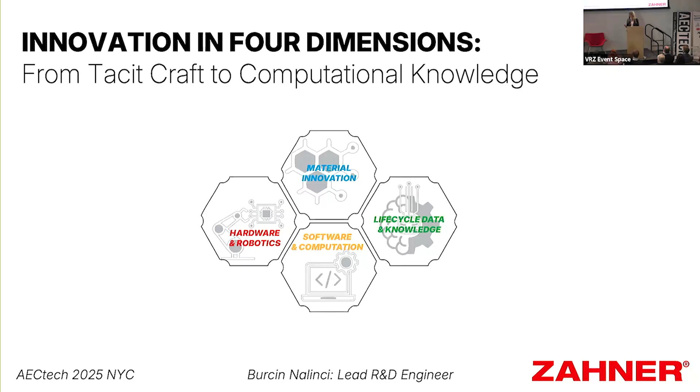If you're not familiar with Zahner, we're a 125-year-old company, so that's 1897, located in Kansas City, Missouri. We specialize in architectural sheet metal fabrication and installation at many scales. Over the decades, we've been part of many iconic and often uniquely challenging projects. So I'm going to scroll through some of those examples and talk a little bit more about our story.

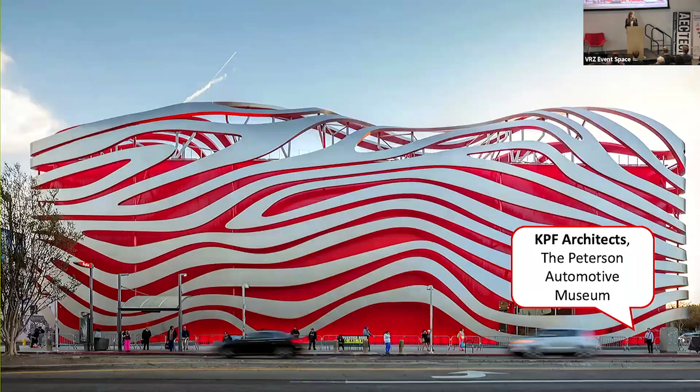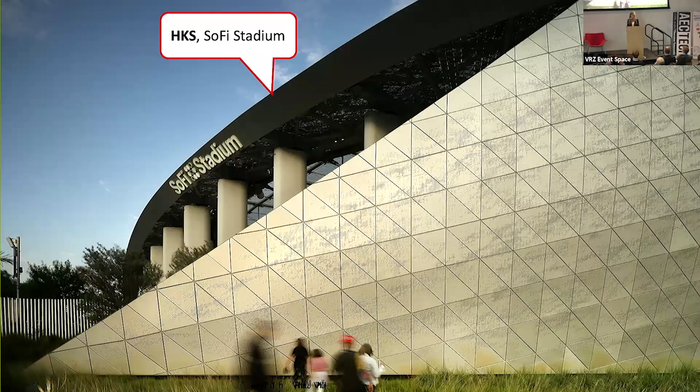Our legacy is built on a culture of innovation, developing new technologies, passing down the generational knowledge of craft, and a desire to explore the unknown, often in collaboration with architects and partners that want to push the boundaries. When the right tools didn't exist, we built them, and we applied them in ways that reshaped architecture, turning sheet metal into complex geometry, pioneering new methods, and scaling custom finishes.

By the 1990s, Zahner was among the first to link CNC machines to architectural models, most famously with Experience Music Project, and that was a turning point. Digital fabrication and computation merged, complex geometry became real in metal.

This is our lineage. From union craft to new technologies, a culture built to innovate. And at the heart of it is something harder to define, but impossible to miss: the tacit craft carried in the hands of our people.

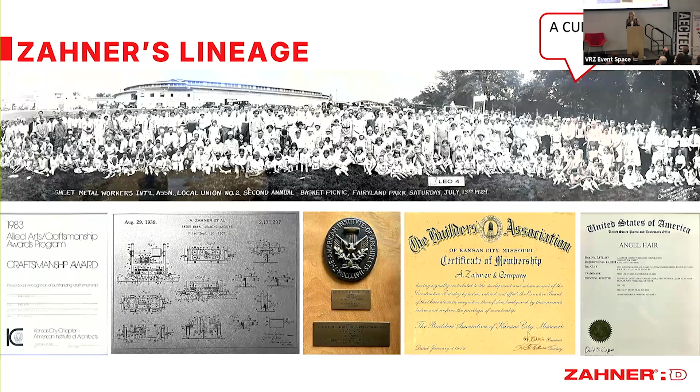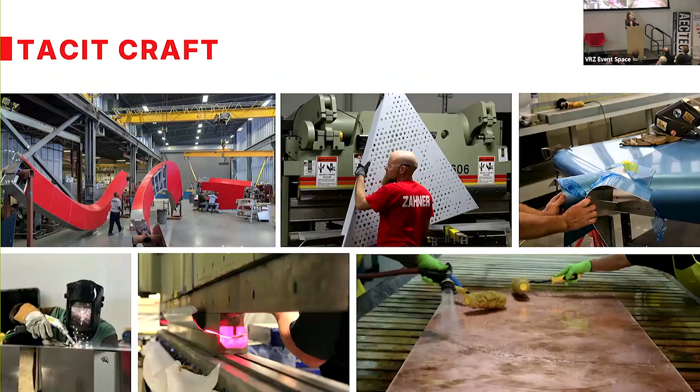Tacit craft is the unspoken, experience-based know-how, the kind that we cannot capture in data or manuals alone. An example of that is a welder knowing by feel when a seam gets too hot and adjusting speed or angle to mitigate that. Or an installer adjusting panels on site, knowing when to nudge, flex, or ease a piece into place without damaging the surface.

So this knowledge carried in the hands of our people defines who we are. It reminds us that the finishing touches belong to craftspeople, the difference between generational buildings and temporary ones.

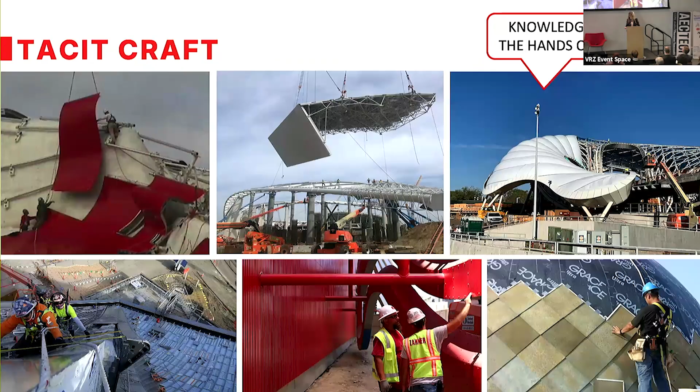Our patented sheet metal seaming machine in the 1930s symbolized necessity driving innovation, but it was never about the tools alone. It was about how we applied them. That kind of mindset has set decades of innovation in geometry, process, software, and machines. And it continues in R&D today.

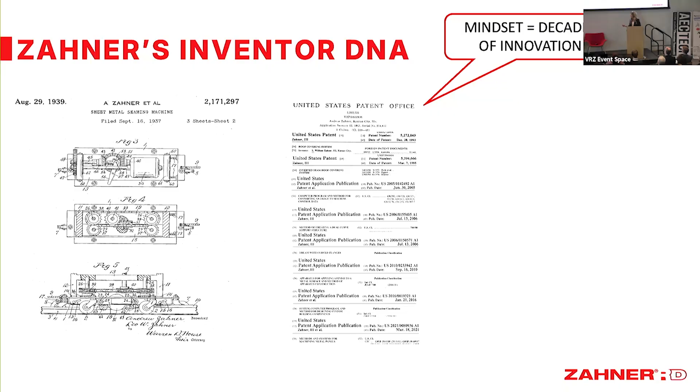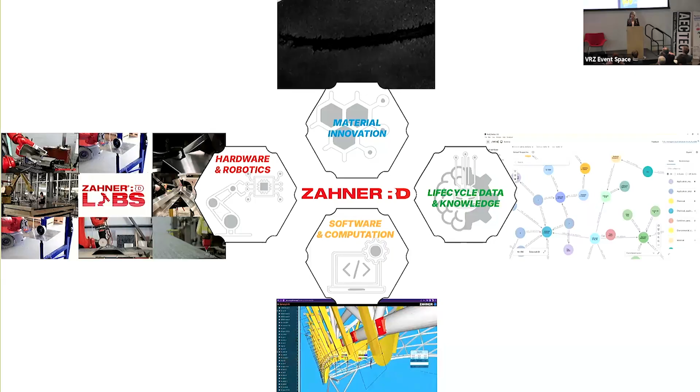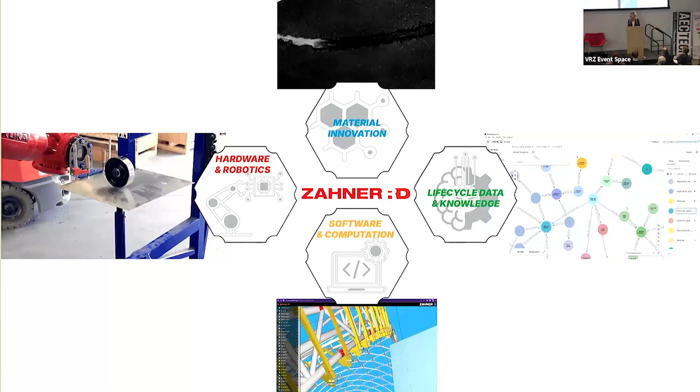Our work is based on four dimensions, as the title suggests: hardware and robotics, software and computation, material innovation, and life cycle knowledge. These are not silos. Instead, they form systems: machines that extend the hand, software that connects people in place, material that evolves, and knowledge that grows with every project we work on.

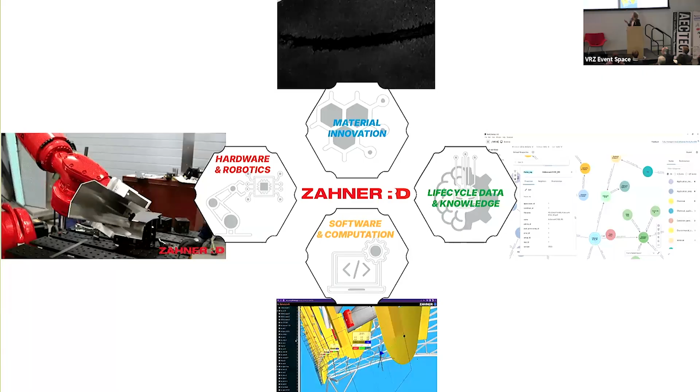So I'm going to scroll through some of the R&D examples here. We'll start in the shop with a project where union craft meets automation with robot-assisted welding.

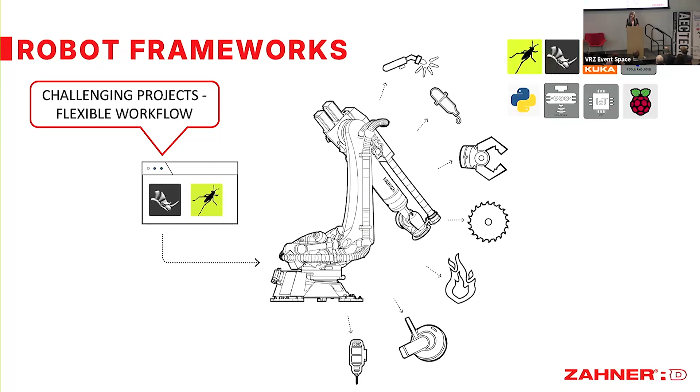With every challenging project we get, robots give us that flexibility. So we love robots. And given our history in union craft, we've been developing robot-assisted workflows to combine the precision and repeatability of the robot with the intuition of the craftspeople. This is all towards empowering the craftsmen.

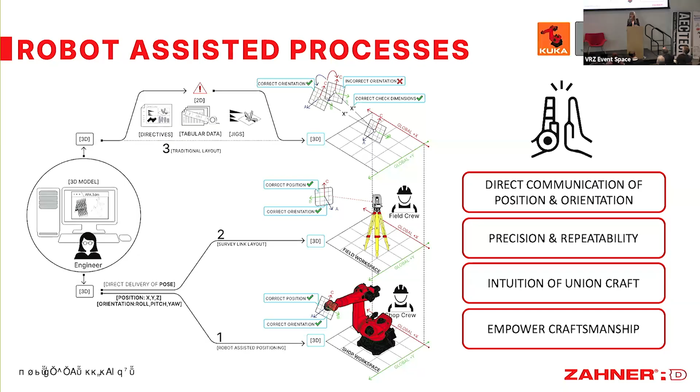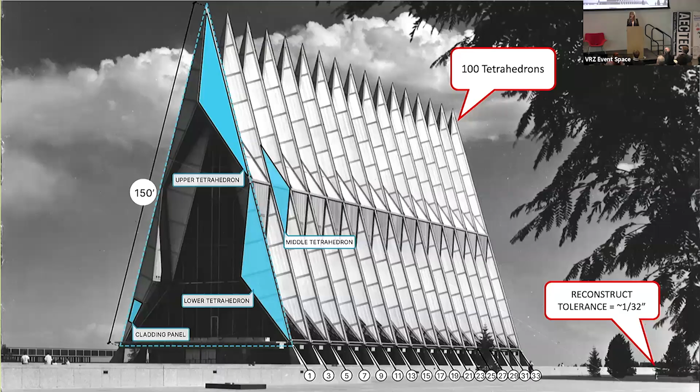Where this process had great impact was the Air Force Academy Cadet Chapel in Colorado Springs. We were commissioned to rebuild the envelope to a watertight condition with 1/32 inch tolerance. Conceptually, the original building was a brilliant piece of combinatorics, repeating parts forming a greater whole. But when we started working on it, every instance was unique due to field conditions and change over time.

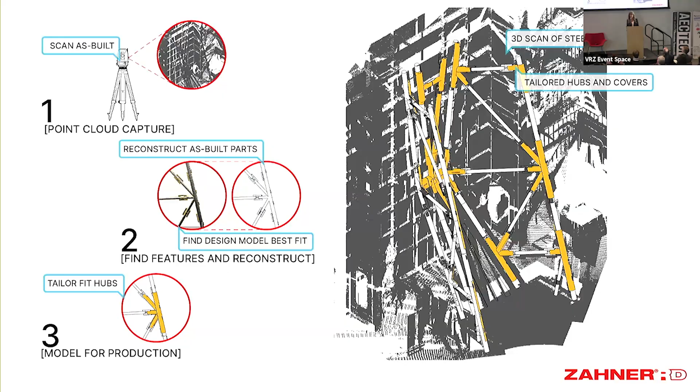So our strategy was simple. We started with 3D scanning the existing structural steel, modeled tailor-fit parts in CATIA, and then generated cut files and robotic workflows using Grasshopper and Rhino. To manage that complexity, we embedded metadata all the way from CATIA and communicated that throughout the process to the robot, including embedded directives in the robot controller, removing the paper directive there a little bit. This way, we were able to index the parts to the robot and back to the digital model.

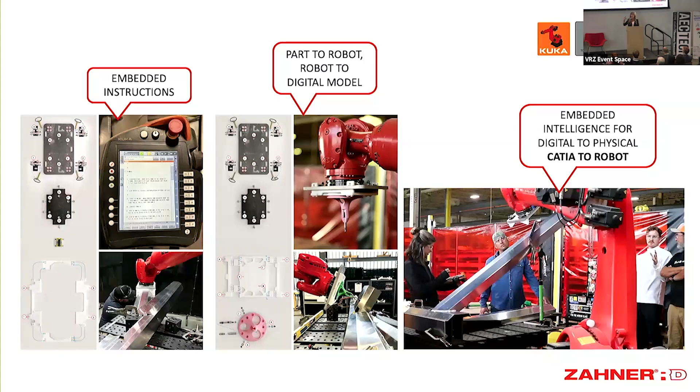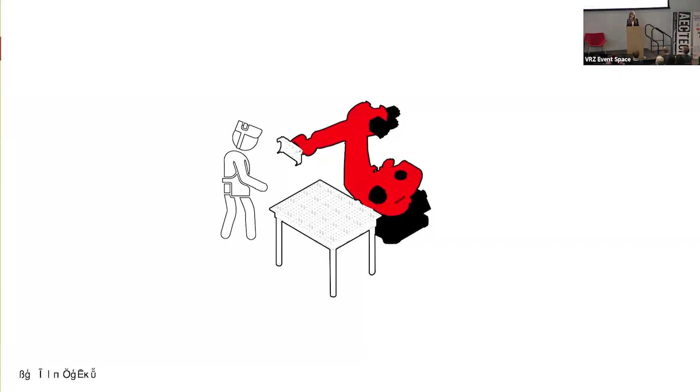The key is we didn't try to automate everything. Welding is full of tacit knowledge, the pace of the bead, the instinct to adjust. Instead of trying to automate everything, we focused on where automation made sense: positioning and orientation. That gave our union welders a precise starting point so they could do what they do best.

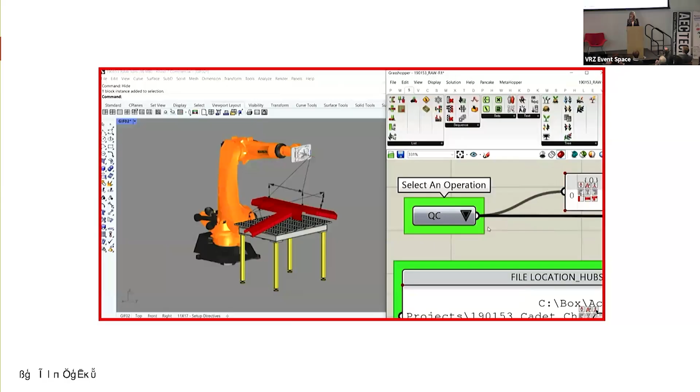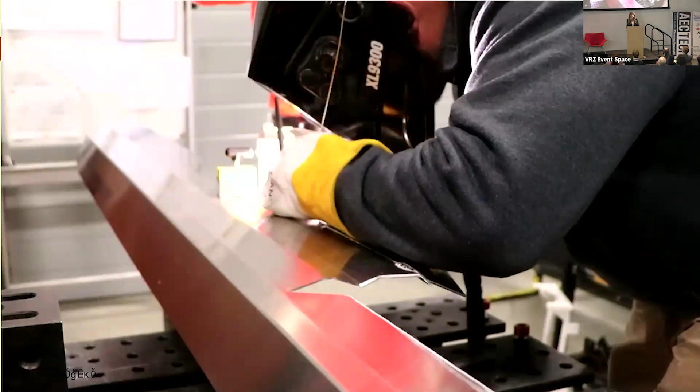In that way, we worked throughout this process side by side with them. I think some of the earlier sessions touch on that, like tool building for people, the users, so getting feedback from the users, in this case the union welders, to make the best process. In the end, the future isn't about replacing craft, it's about making it enduring, turning their expertise and experience into knowledge that we can build on.

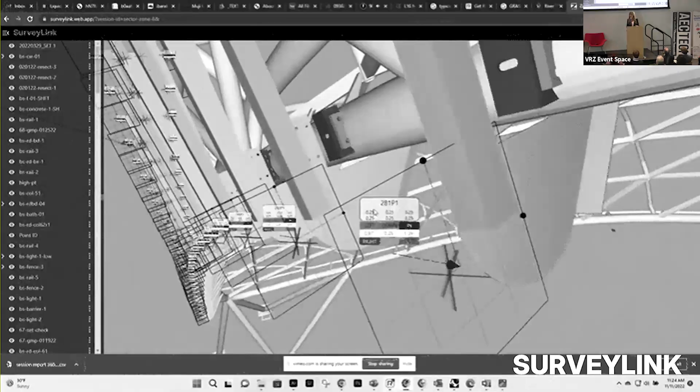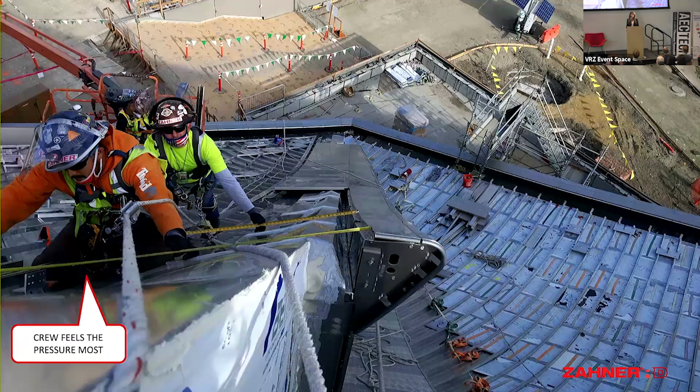So next up is the field, with a project where union craft and automation come together. In this case, every scope converges with SurveyLink. This is the riskiest phase of a project, not just because of tough working conditions, but because even the smallest error can cascade into costly rebuilds or schedule delays.

The install crew feels that pressure the most, juggling fast-moving parts, often relying on 2D directives, dimension tables, or checking manually. So our question was simple: how do we extend computation to the field? The answer was SurveyLink, not to replace the craft, but to remove the guesswork so crews can spend more time building and less time checking.

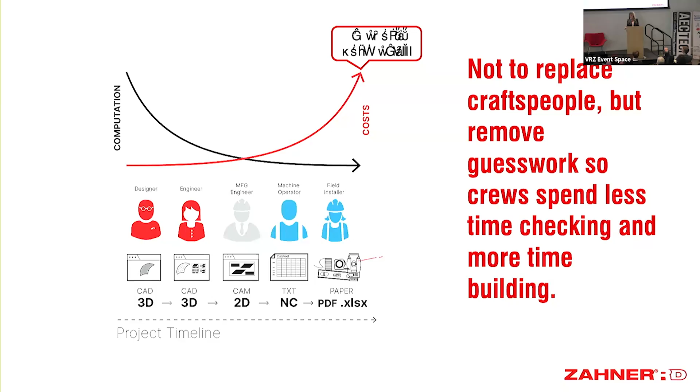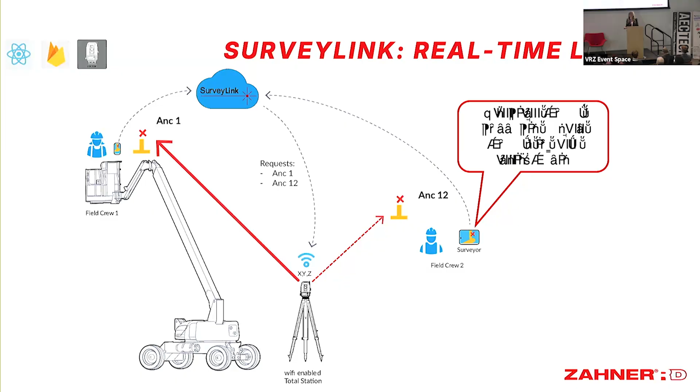SurveyLink is Zahner's proprietary in-house developed platform that connects the design model to field instruments, giving precise position and orientation information to any stakeholder. That means robotic total stations, 3D printed jigs for reflector prisms, and a cloud platform built in JavaScript to queue and track positions.

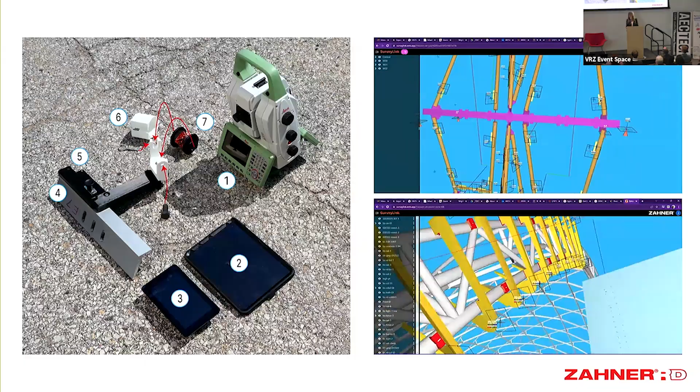So we scan the field condition, we get a point cloud, and then reconcile that with the design model, creating a directing model that feeds our web platform and the cloud calculators.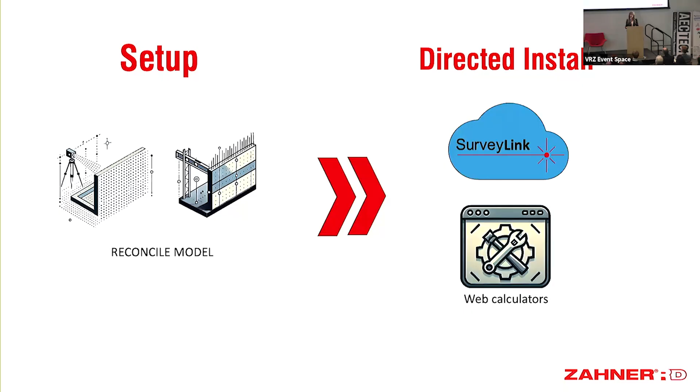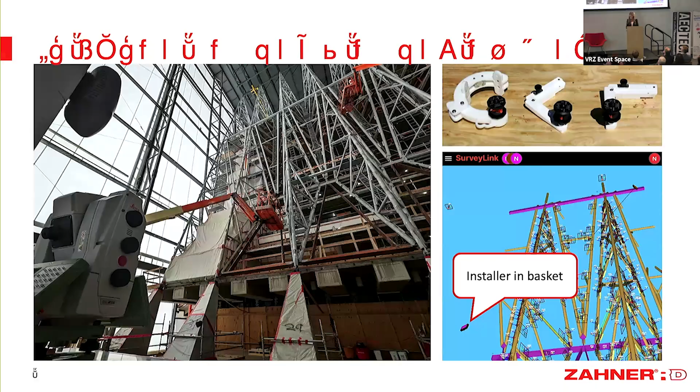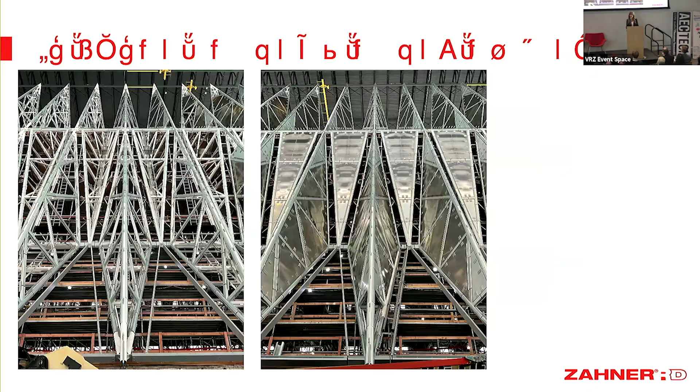SurveyLink has already been deployed on many projects. Air Force Academy Cadet Chapel is one of them. At the chapel, we drew roughly 6,000 anchors into place, which means the rest of the scope just flies in. Currently, the crew is installing the very last bits of the hubs we looked at with a robot-assisted welding process.

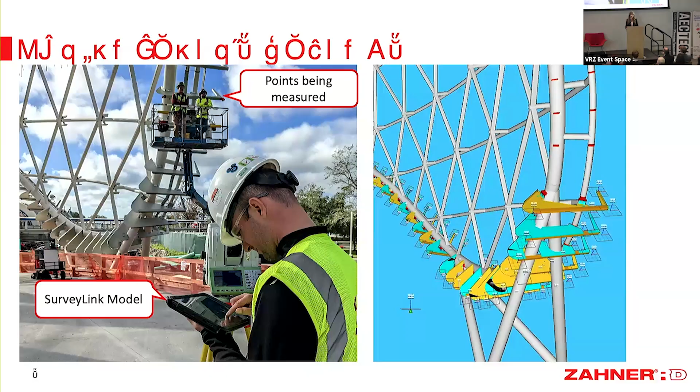Here's another project, same kit of parts, very different geometries. With this project, there were 1,600 unique dual curved surfaces, or very complex curvatures, forming a continuous curved finished building. Here's the space shuttle Endeavour, being housed in the California Science Center.

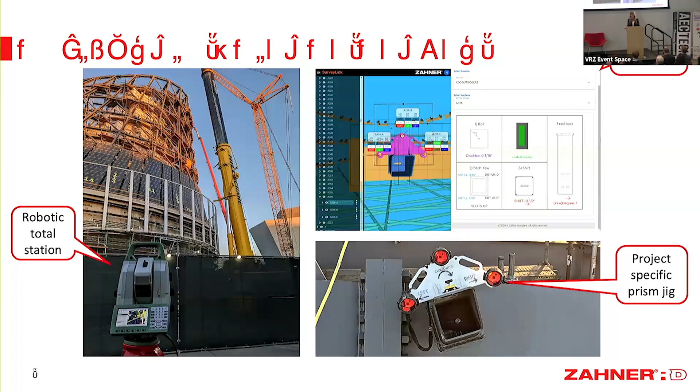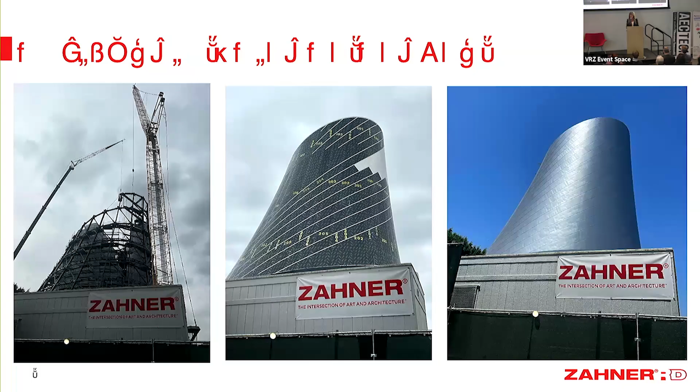Exactly the same process, same kit of parts, again different geometries. With this one, we drew roughly 350 outriggers into place, resulting in ZEPs and skins flying into place without any issues.

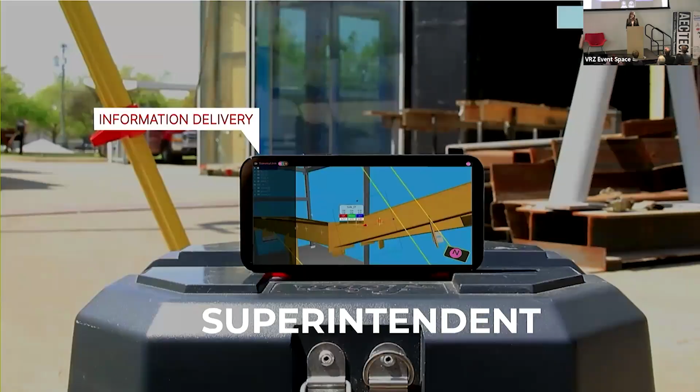SurveyLink is a project-agnostic tool that helps our field crew navigate complex layout processes. It turns feedback loops from days into minutes, with data accessible to everyone - installers in a basket, managers in the office, or even stakeholders checking in remotely. With every deployment, it leaves a digital trace, so we can start collecting that data, analyzing it, and identifying pressure points earlier on, making better judgment calls earlier, both in the shop, field, and design.

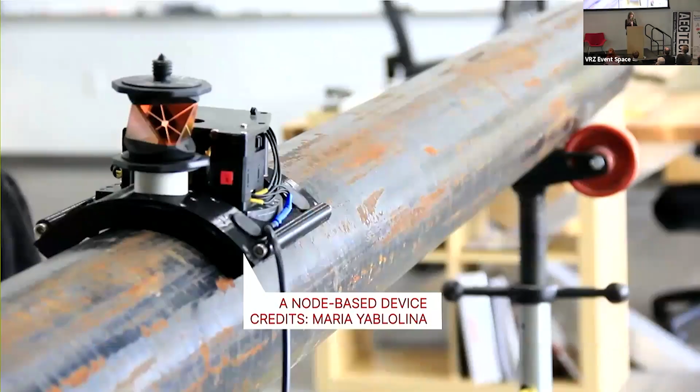And because it's a node-based platform, we can connect other communication devices into the system, like the crawling robot we did with Maria Yablonina to access hard-to-reach places. But again, with this one, I think the future points us towards not automating robots, but connecting the knowledge back into the life cycle itself.

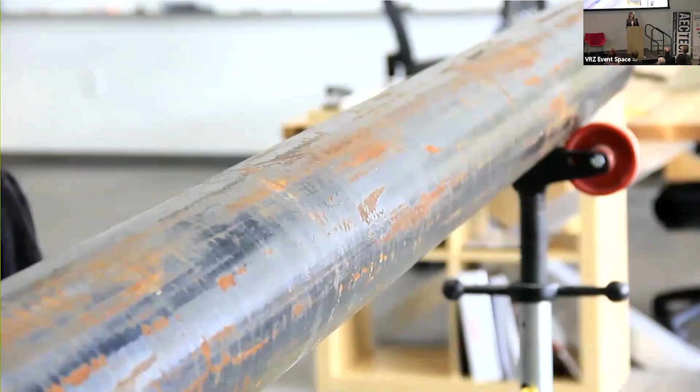So far we looked at how robots, craftspeople, and computation form, shape, and position geometry in shop and field. But some of these principles extend to the very surfaces of the metal itself. So we'll take a look at patinas.

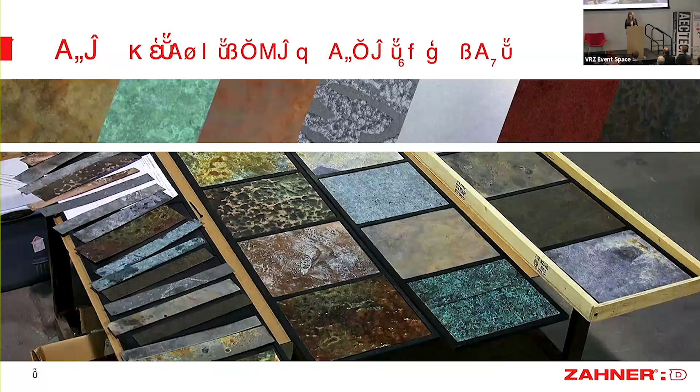Patinas are living minerals that form on metal surfaces. They are both aesthetic and performative. They change with environmental stimuli, like salinity, pollution, time, just to name a few. In nature, this is a very slow forming process. It's also a very unpredictable process, but beautifully complex.

At Zahner, we learned to guide that process. For decades, we've been working with pre-weathered patinas, experimental, hand-applied, eventually deployed on major projects. But much of this work has been developed under the leadership of Bill Zahner. He often reminded the team that patinas need controlled variation - too much control, and it's just like paint.

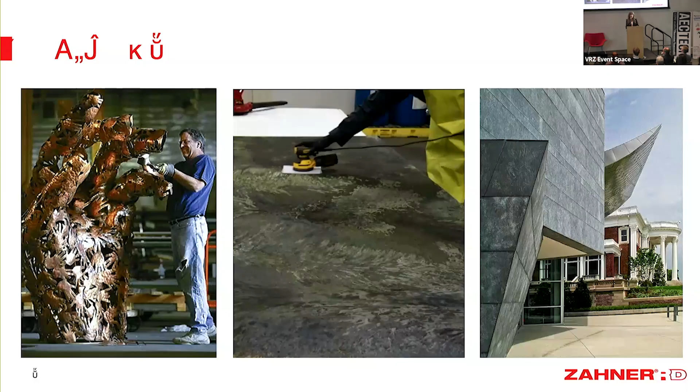So our patent-pending process, selective patina, builds directly on this legacy of control and variation that Bill described.

With selective patina, our designer tools extend into a new space where we can convert design intent into machine instructions. With selective patina - and my titles are funky, I just noticed that - designer tools become chemicals that accelerate or resist oxide growth.

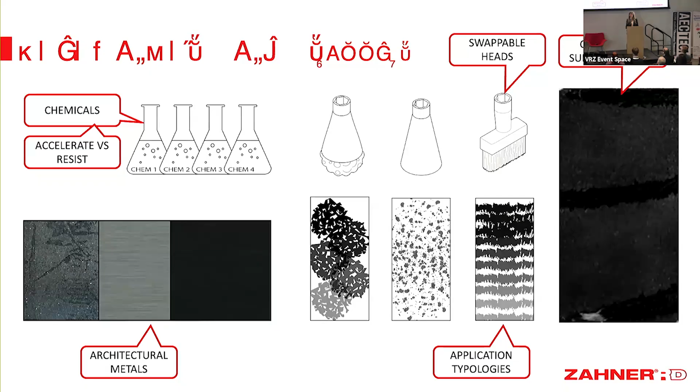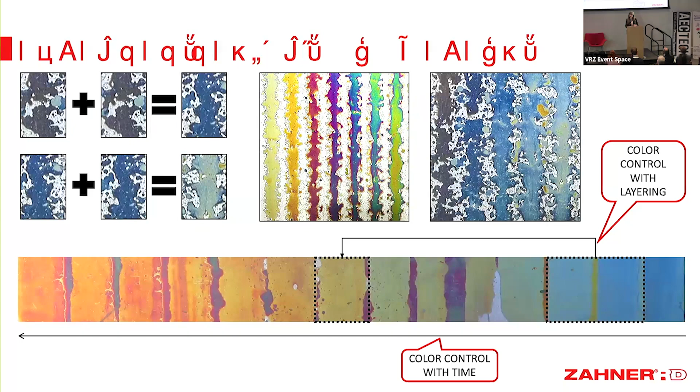Another one is fluid dynamics. Spray heads can act as filters, high pass versus low pass, how the chemical spreads on the surface with motion control. Or time and sequence could become a design parameter - we can layer chemicals to get certain colors or build toward a performance criteria. Or we can manipulate spray density at the computational level of droplets or overspray.

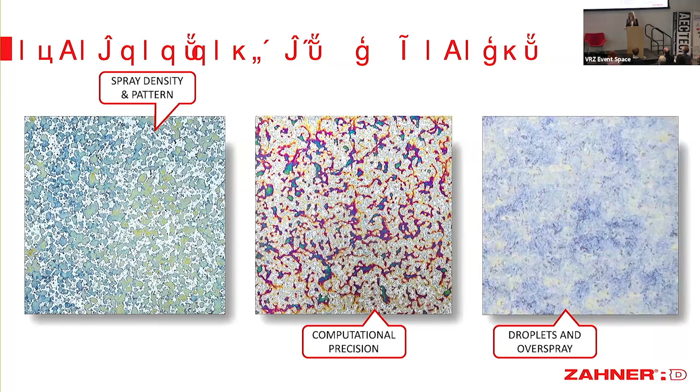Once you start designing with recipes, layering, and motion control, this no longer becomes a design exercise of form, but rather process physics.

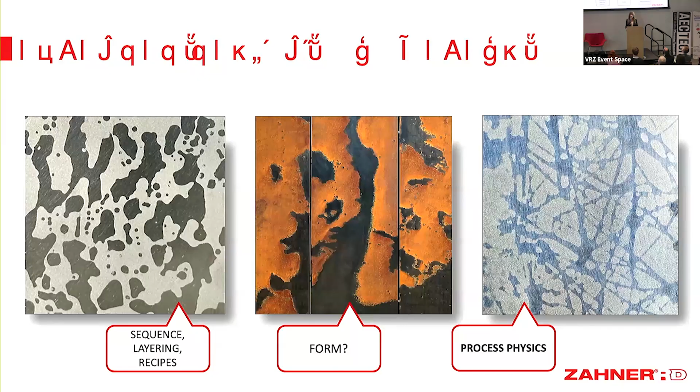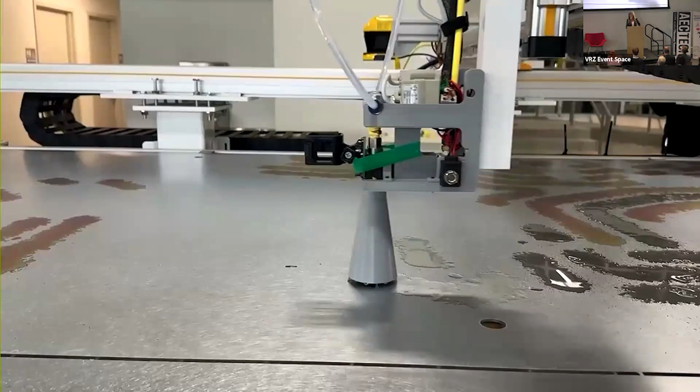In summary, selective patina makes finishing programmable, a CNC for chemistry. Repeatable when we want it, and variable where we design it. With plug-and-play tools, we can start chaining devices, and start developing new processes in collaboration with design teams.

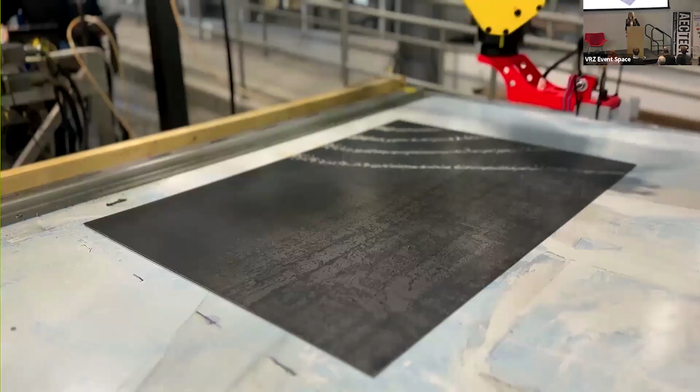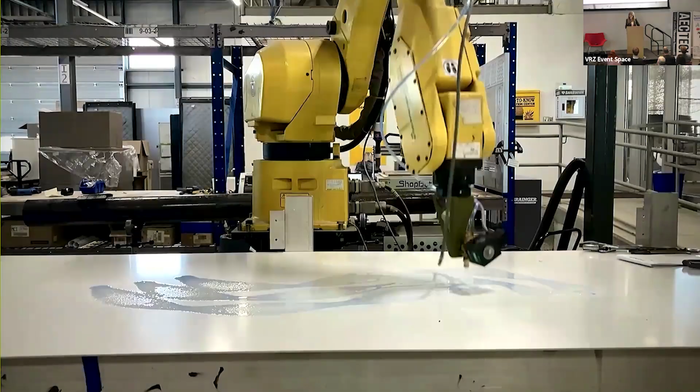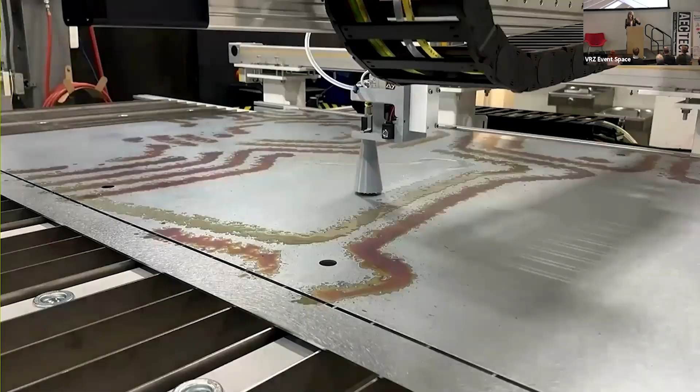The exciting part about this process is that we have a parallel computing framework that listens to every line of code being executed in real time, and adjusts application settings. As the machine runs, we're starting to collect data from IoT embedded devices to gather feedback from the application process, so it can become a system that learns from every surface it makes. This allows us to do repeatable things.

But to understand patinas in the way we want to extend these design parameters into environmental variables and such, we really need to dive deeper into understanding patinas within the environments they exist in. So that's where computational patina comes in.

This is kind of newer work that we've been diving into. Computational patinas is a data-driven ecosystem of tools that turn patina knowledge into programmable, predictive, and performative surfaces. There are 5 layers to this framework: data collection, data processing, data structuring, relational modeling, and finally the insight engine. We started this journey with what we know, which is our 8 legacy patinas.

We built a data collection system where we take images of our patinas as they age in the environment. We also built up an environmental metrics collector sensor system. Once the data is collected, it goes to processing where it gets cleaned, structured, and made classifiable.

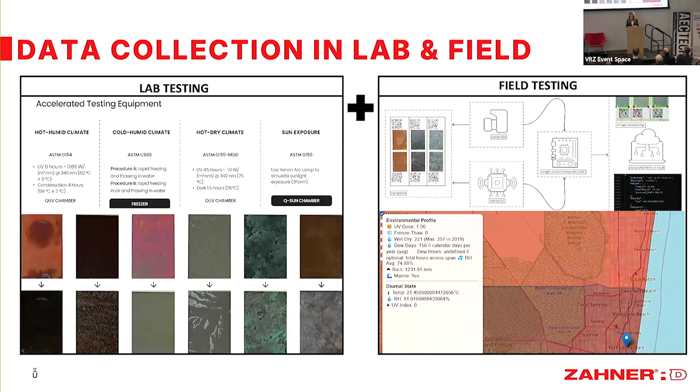We have 2 points of data collection in this case. One is in the lab using our accelerated weathering chamber, so we can start seeing cause and effect very quickly. The other is out in the real world with our IoT field kits, so we can understand how they naturally actually change.

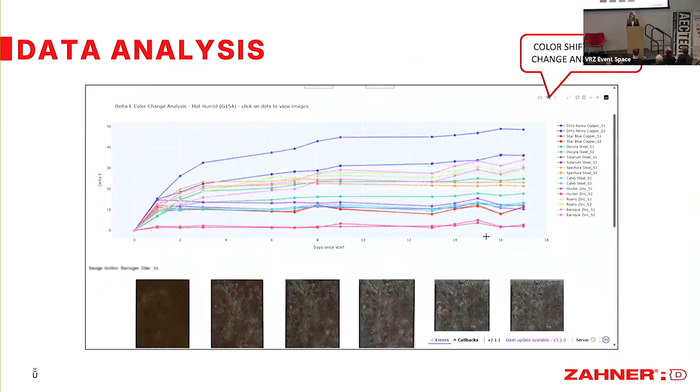Once we have this pipeline, we can start automating collecting the data and analyzing it. Especially in this case, we're looking for color change in relationship to the environmental parameters.

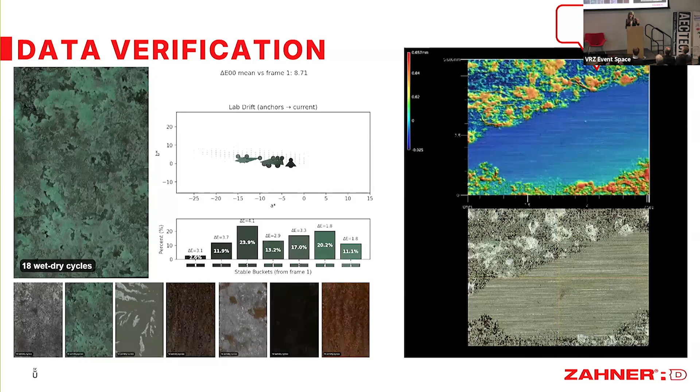But again, just color change isn't the deep understanding there. So we've started working with external laboratories to develop a pipeline to understand color change to mineral build correlation.

There's also a lot of other data collection points at Zahner. Patina knowledge is not just how the patina ages, but the decades of generational knowledge that we have. So we're actively looking for new methods and technologies that might help us collect and build upon that.

So we cleaned our data, and it's ready to be structured. We structure it in an SQL database. From there, it goes into our relational reasoning pipeline, where we can use the tables we created, like metals and chemicals, and start building the relationships between them.

For example, a chemical or a recipe uses a chemical, or a mineral forms on a metal type of relationship. This gives us that cause and effect understanding.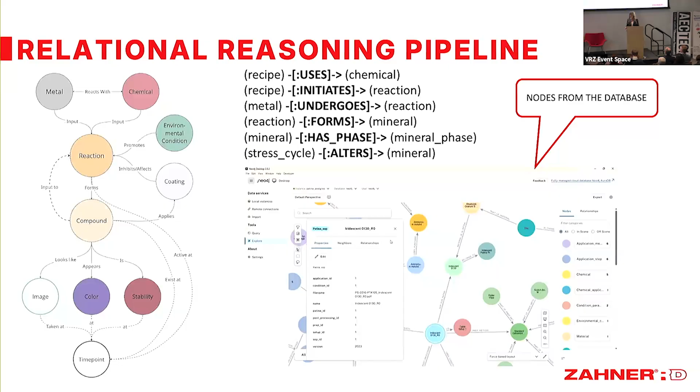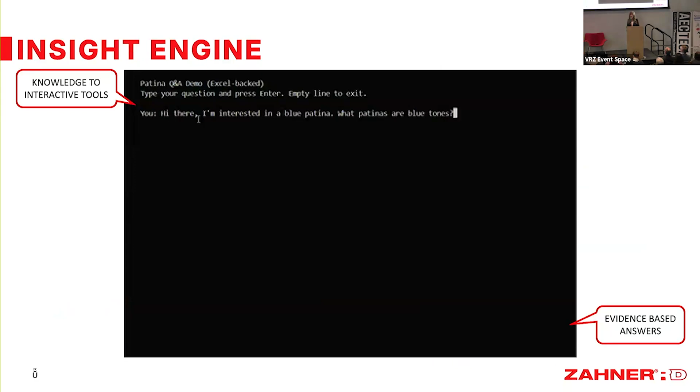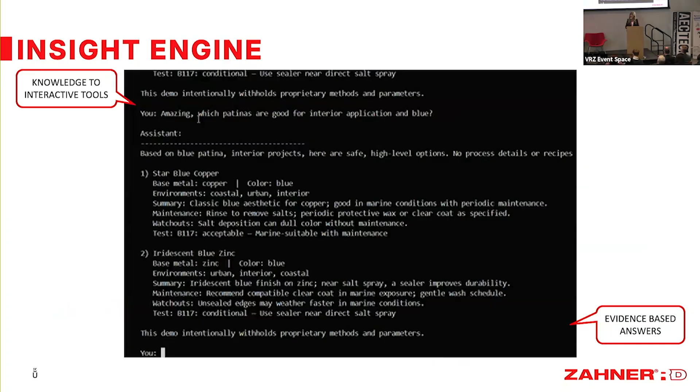Finally, this little command-line looking chat box is kind of our version of it, where we can start asking questions and get evidence-based answers, like which patina performs best in zone B versus zone A, or can you suggest a recipe if the parameters of the project are this.

The last insight engine is our weather-to-stress-cycle pipeline. We started connecting all this testing data into real world weather data, so we can start understanding how patinas age in real conditions.

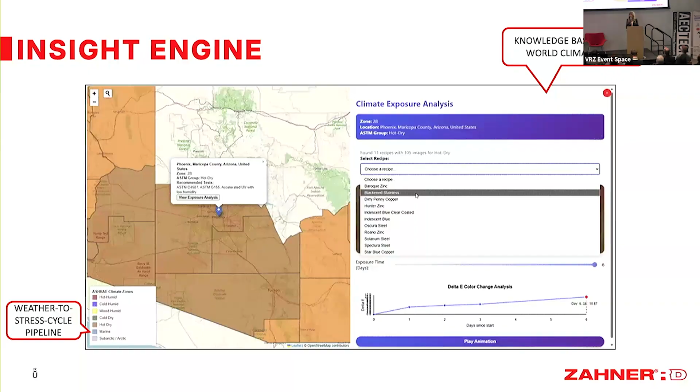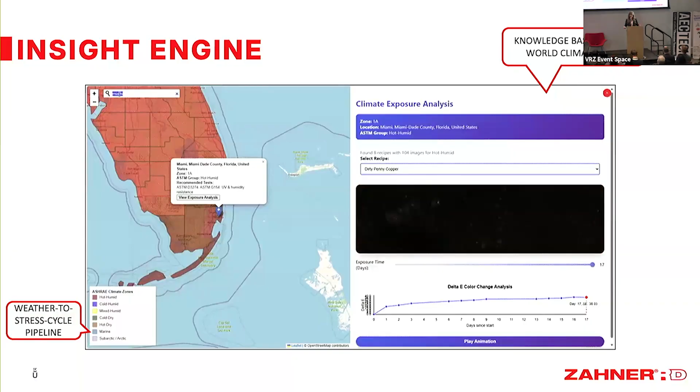Some of the additional work we want to do here is make a more robust stress cycle calculator and prediction algorithms, and also incorporate historic Zahner projects, because with that many years of history and projects aging in the real world, I'm sure there's a lot better understanding there that we need to tap into.

All of this work builds towards one goal, and it is not prediction, it's translation. It's a way to turn all of this knowledge into parameters that can inform design decisions.

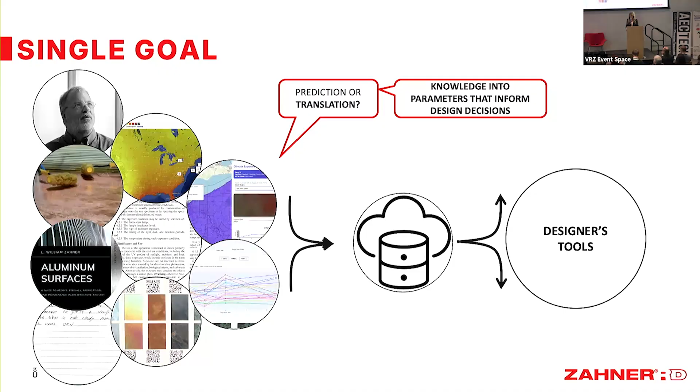I started with Zahner's story. From the beginning, Zahner's story has been about its people, their craft, their ability to see possibility where others see limits. With all of these efforts, we're trying to extend that into the design space so knowledge can become something more generative instead of static, and we can start connecting people who design to people who make, and the materials that bring both to life.